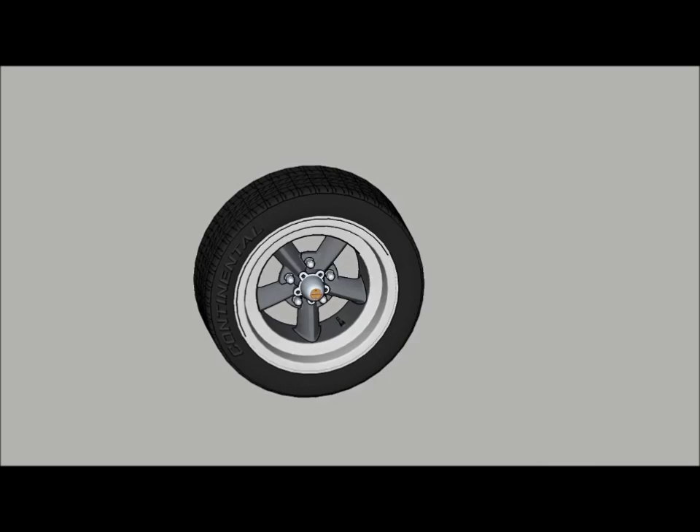Say you drive your car to work. When the flat tire indicator lights up on the dashboard, you pull over to investigate. But all the tires look the same. Wouldn't it be neat if you could use nothing more than your smartphone to quickly tell which tire has lower

pressure? We propose a non-contact tire pressure reader using a smartphone based on our patent of visible light to camera communication. A small pressure sensor in the tire valve cap has an LED that blinks to transmit encoded information about its measurements, which the smartphone's camera then receives and decodes.

The product is a small pressure sensor for tires, built with a Silicon Labs EFM8 SleepyBee microcontroller, which is a perfect match for this application thanks to its low cost, small form factor, and ultra low power consumption. Due to the small 3 mm by 3 mm size of the MCU, the entire circuit, including small pressure sensor and the tiny watch battery, can be embedded in a tire valve cap.

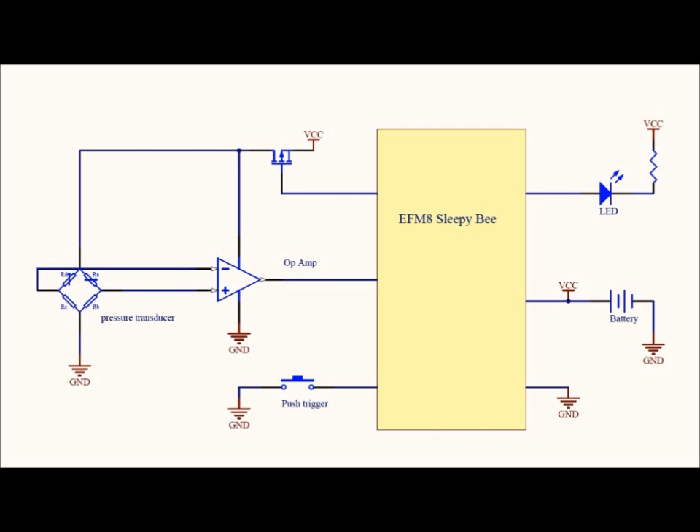The MCU's ultra low power consumption allows the device to run for years without needing to change the tiny watch battery. The MCU's built-in rich analog peripherals can easily interface with a pressure sensor, and the on-chip temperature sensor can be used to collect the air temperature. The high current sink capability of GPIO pins can directly drive the LEDs.

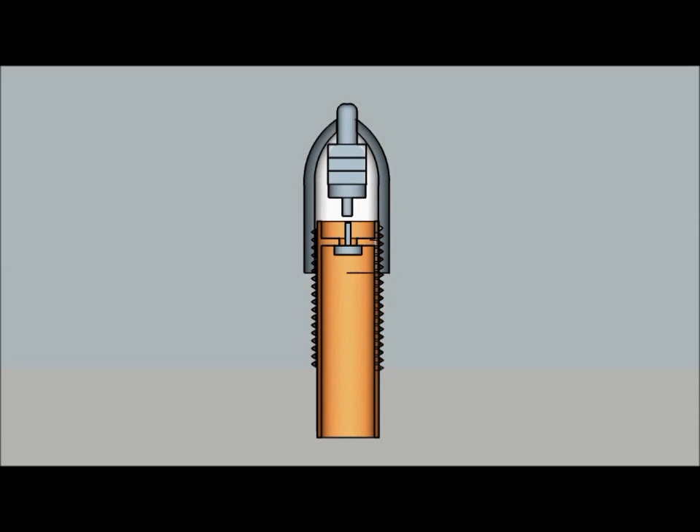The pressure sensor embedded in the tire cap looks almost identical to a regular tire cap, but there is a tiny LED in the top of the cap. Inside, the SleepyBee microcontroller, the air pressure sensor and the operational amplifier for conditioning the pressure sensor output and the battery are packed as shown in this cross-section of the cap.

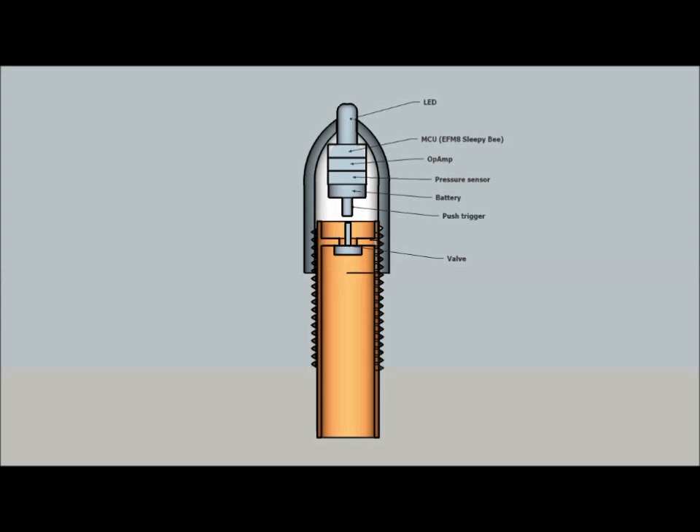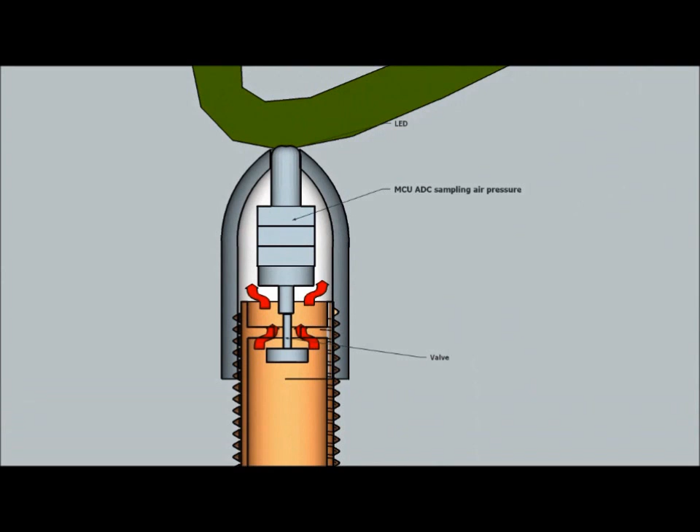To check the pressure, simply press down the cap. A mechanical pin pushes the air pressure valve down slightly, releasing a small amount of air into the sealed cap internal space. The press also triggers the microcontroller to power on the pressure sensor circuit and to sample the air pressure.

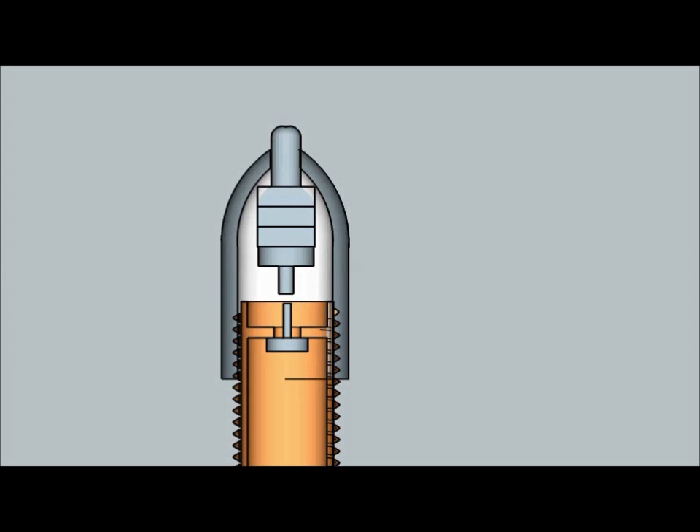After releasing the cap, the LED starts blinking, transmitting the encoded pressure data, temperature information, and the clock reference. Now just point the smartphone's camera at the blinking LED. The app uses the camera to sample the light transmission frame by frame and immediately decodes and displays the tire pressure with the temperature correction.